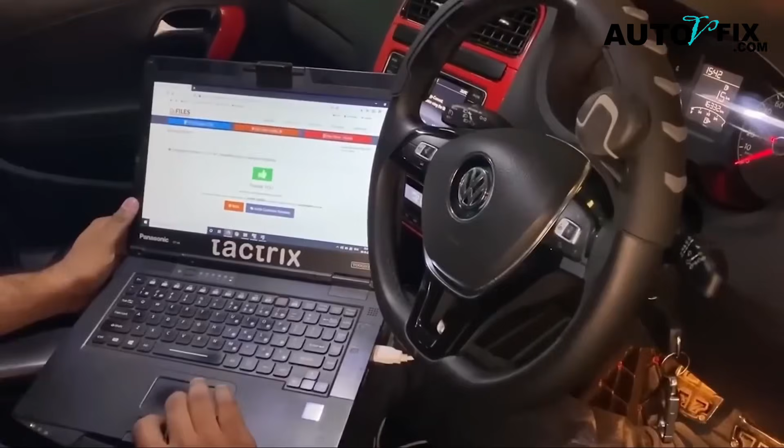If you reset your ECU at the wrong time, you can erase learned settings, hide the real problem for a short time, and still end up buying parts you never needed. And if you think ECU Reset, ECU Relearn, and ECU Reprogramming all mean the same thing, think again, because that confusion alone can cost you huge money.

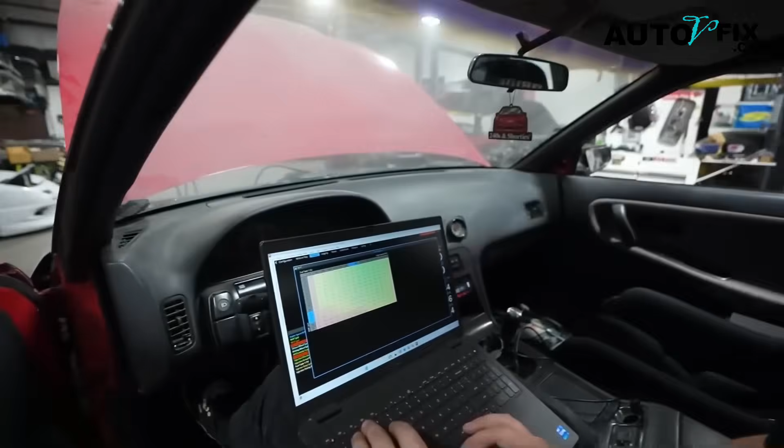So before you buy parts you don't need, let me show you what an ECU reset actually does, what ECU reprogramming really means, and how to reset the system correctly with or without a scanner. Because this is one of those areas where people make mistakes, clearing something they do not understand, and then end up making the car run worse instead of better, which is why this video is one of the most important videos you will have to watch on this topic.

If you are one of those drivers who hear the words ECU Reset, ECU Relearn, ECU Reprogramming, ECU Flashing, and ECU Reset after battery disconnect, and you assume all of those things mean the same thing, well, they do not. And if you mix them up, you can end up expecting a reset to fix a mechanical problem, or thinking a software reflash is the same thing as clearing adaptive memory.

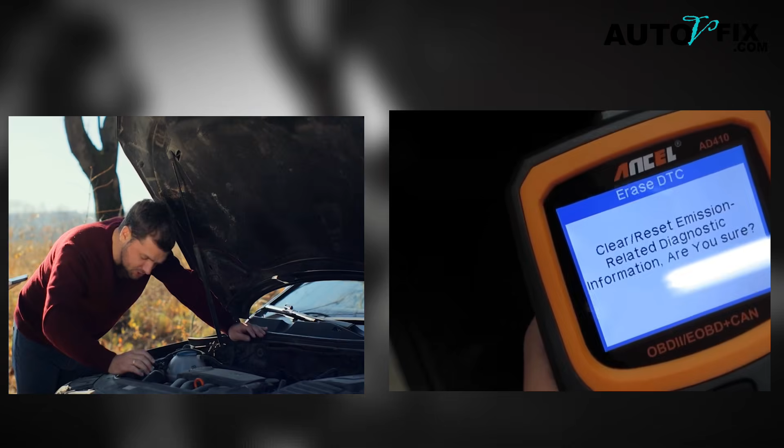It is not. So in this video, I am going to break this down as much as I can to show you what the ECU actually does, when resetting the ECU can help, when it will not help at all, the difference between ECU Reset and ECU Reprogramming, and how to reset it properly with a scanner and without a scanner. With that said, let's now start with the foundation.

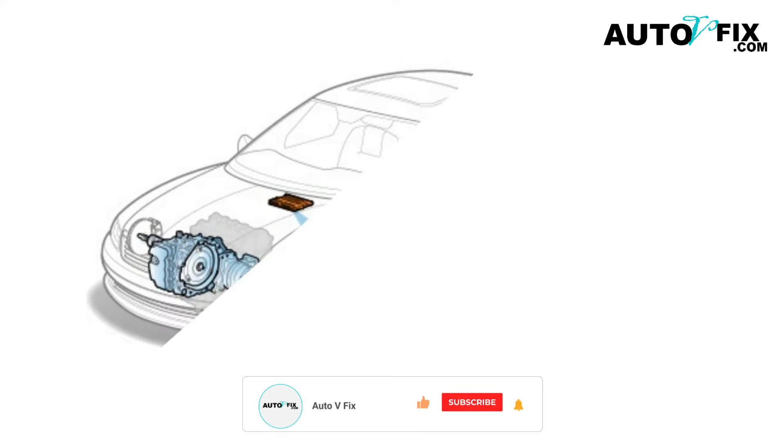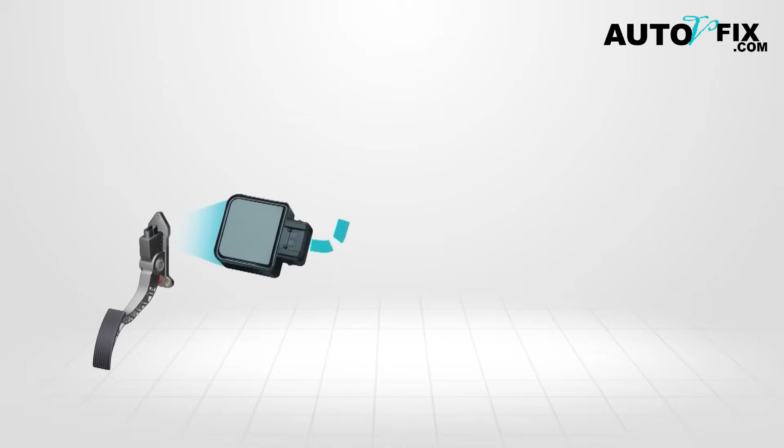What is an ECU? The ECU, or Engine Control Unit, is the computer that manages many of the engine's operating decisions. It uses input from sensors around the car and then adjusts things like fuel delivery, ignition timing, idle behavior, throttle response, emissions-related operation, and, in many vehicles, part of the communication that affects transmission behavior as well.

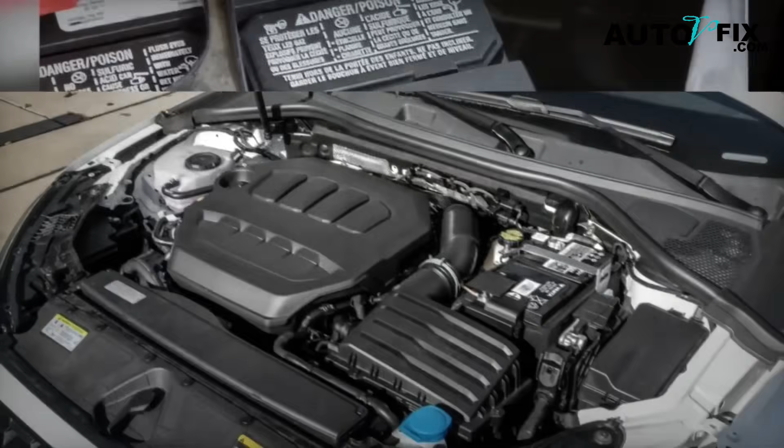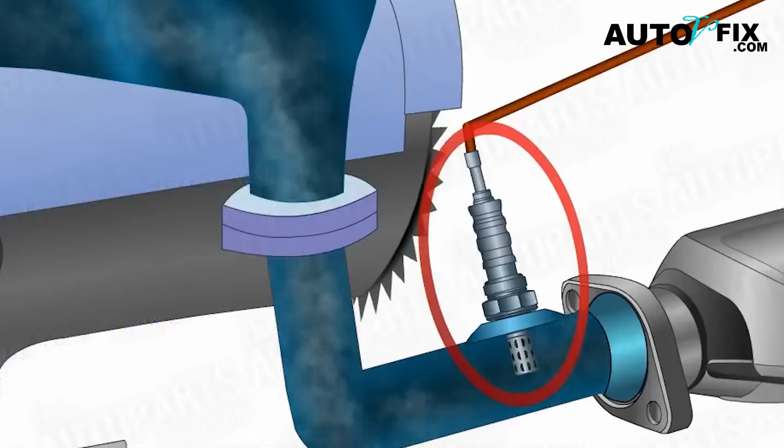So when you press the accelerator, you are not directly commanding the engine the way many people imagine. In a modern vehicle, you are sending a request. The ECU reads that request, checks sensor data, compares it to its programming, and then tells the engine how to respond. It looks at things like throttle position, oxygen sensor feedback, air intake data, engine coolant temperature, and more. Then it makes decisions in real time.

That is why the ECU matters so much. It is not just a box sitting there. It is constantly learning, adjusting, and correcting. And this leads directly to the reason people talk about resetting it in the first place. Why does resetting the ECU sometimes help?

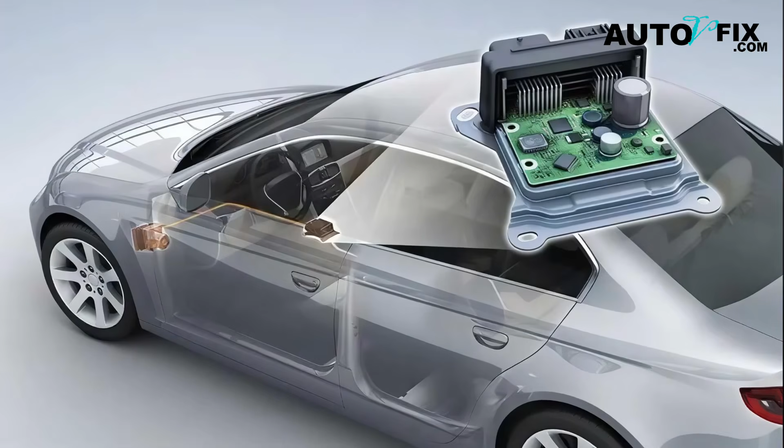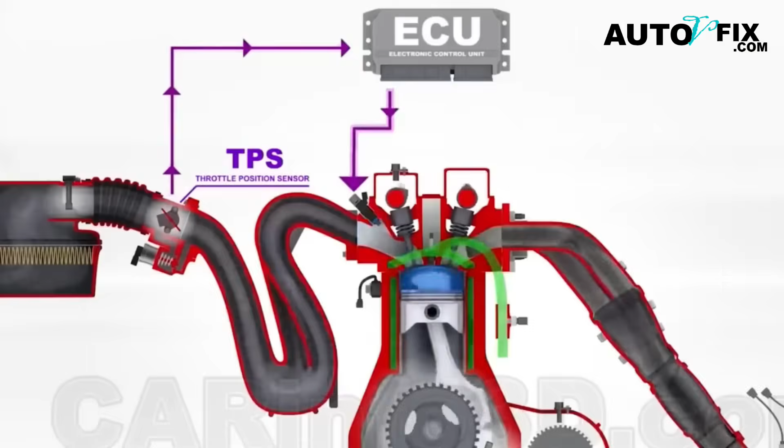Over time, the ECU stores what are called adaptive values, or learned memory. These are adjustments the computer makes based on sensor feedback, engine wear, carbon buildup, driving style, and conditions over time. In many cases, that helps the vehicle run better because the ECU is not relying only on fixed factory values. It is adapting. But sometimes those learned corrections are based on a problem.

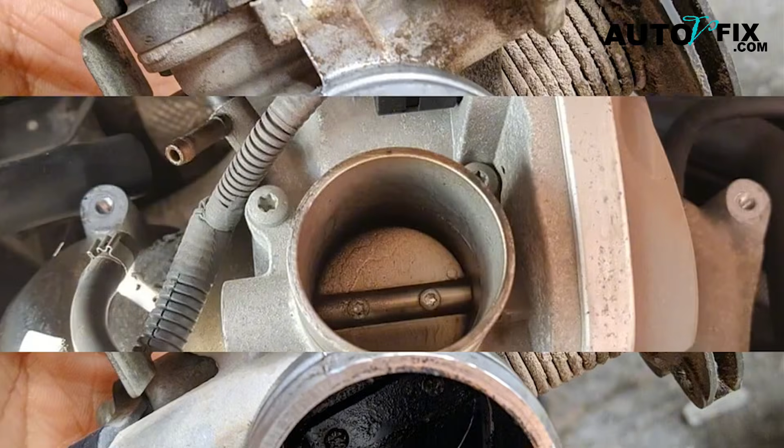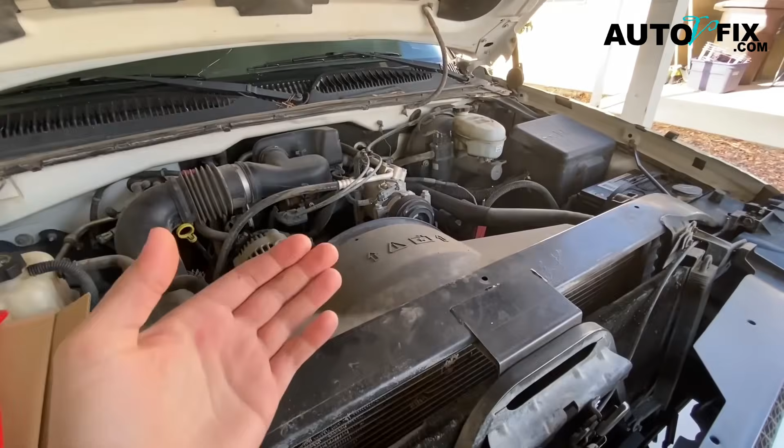Maybe the throttle body was dirty. Maybe a mass airflow sensor was weak. Maybe an oxygen sensor was reading badly. Maybe the battery was low. Or maybe the engine had been compensating for a vacuum leak or poor idle condition. Then you fix that problem, replace the bad part, or clean the component, but the ECU may still be carrying old learned behavior based on the faulty condition.

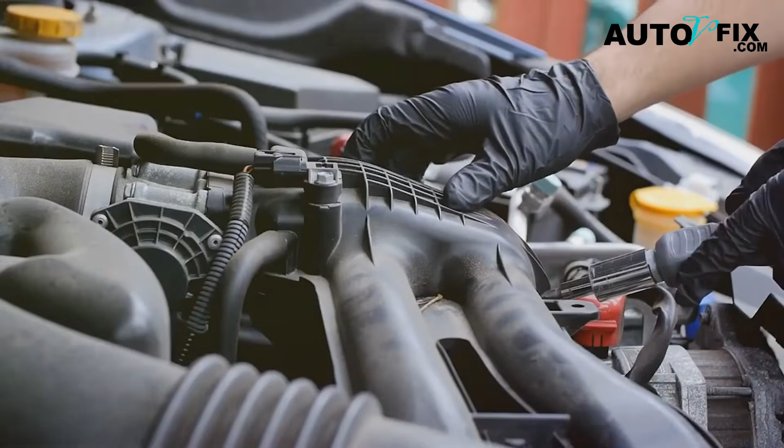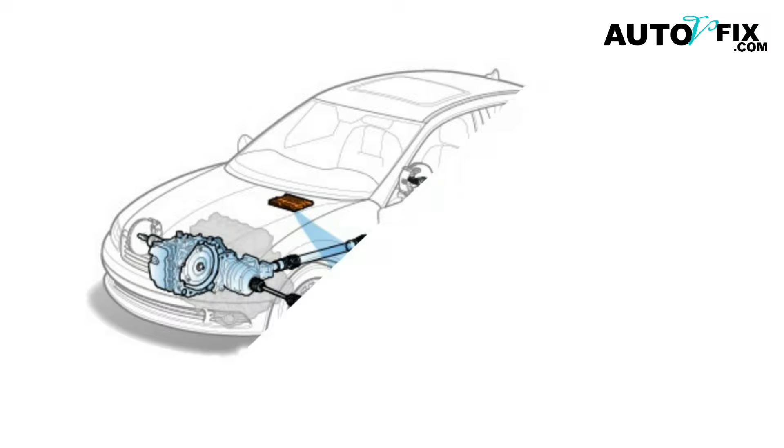That is where a reset can help. Resetting the ECU can clear learned adaptive memory and give the system a chance to start fresh. It forces the vehicle into a relearn process where it builds new values based on current sensor data instead of old corrections. And yes, sometimes that really does make a noticeable difference.

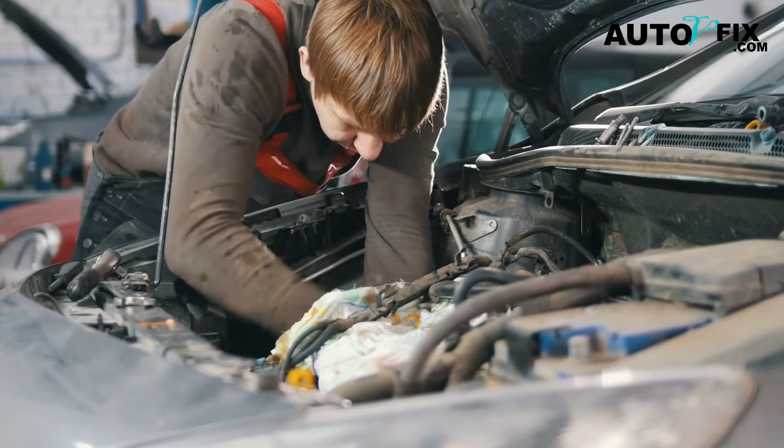For example, if a car had poor idle behavior because it had adapted around a dirty throttle body or a weak sensor, then the bad part gets replaced. A reset may help the ECU stop relying on those old learned adjustments. After a proper relearn drive, the engine may idle smoother, respond better, and behave more normally.

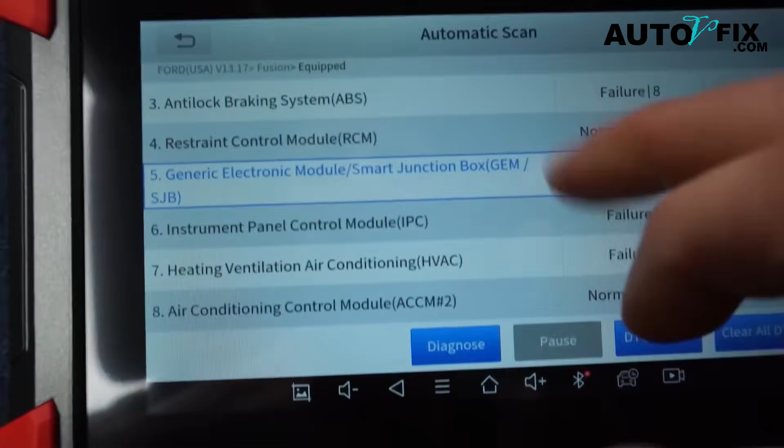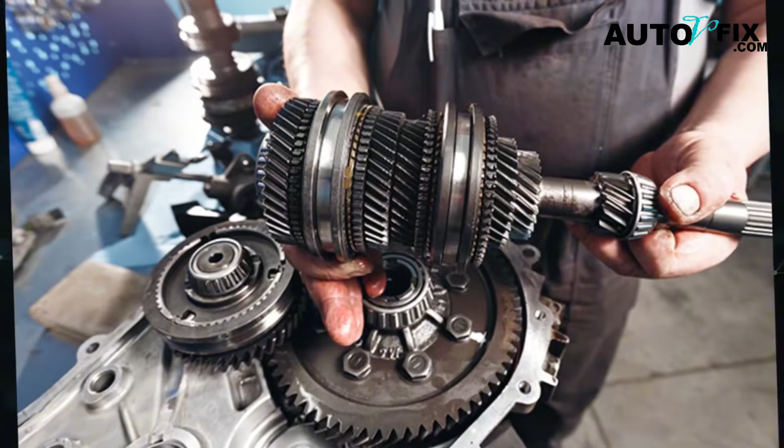But this is where people go wrong. Resetting the ECU is not a repair by itself. It does not fix a vacuum leak. It does not repair a bad ignition coil. It does not heal a slipping transmission. And it does not permanently solve a check engine light if the actual problem is still there.

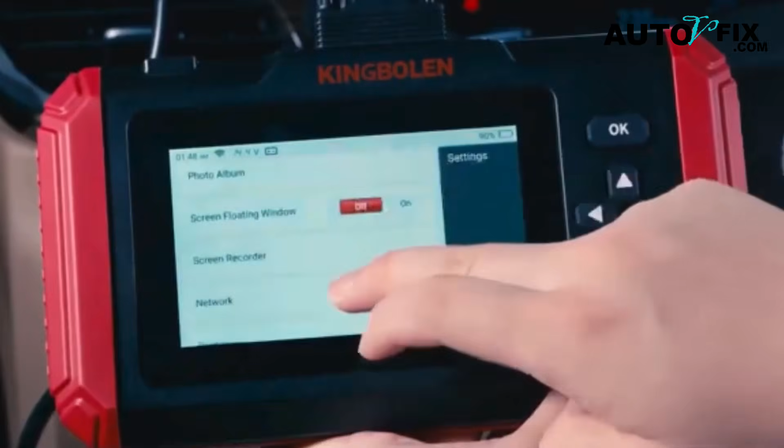A reset only clears learned memory and, depending on the method and vehicle, may also clear stored trouble codes. If the fault still exists, the problem usually comes right back. So before we go any further, just remember this. A reset can only help your computer to relearn new data, but it cannot fix broken parts.

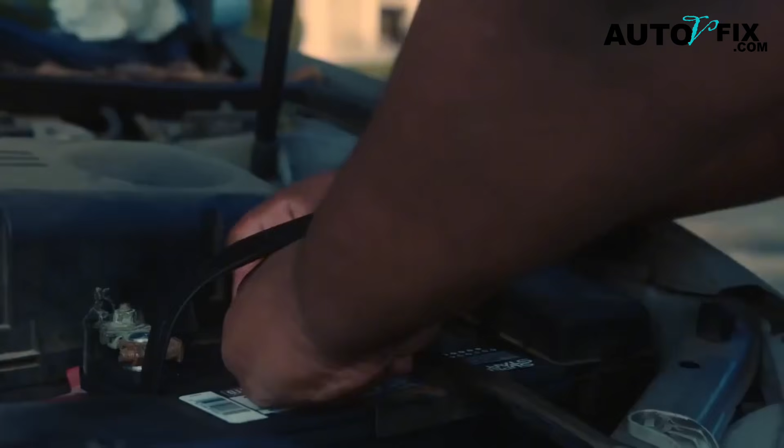Now, let's clear up one of the biggest sources of confusion: ECU reset versus ECU reprogramming. These are not the same thing. An ECU reset usually means clearing learned values, adaptive memory, and in some cases, stored codes, depending on the method used and the vehicle design. It is basically the system starting over from baseline learned behavior. It is not new software. It is the same software starting with less memory of past driving conditions.

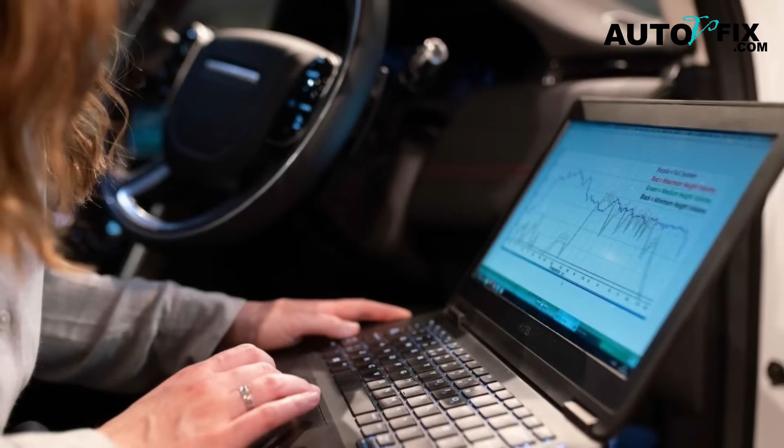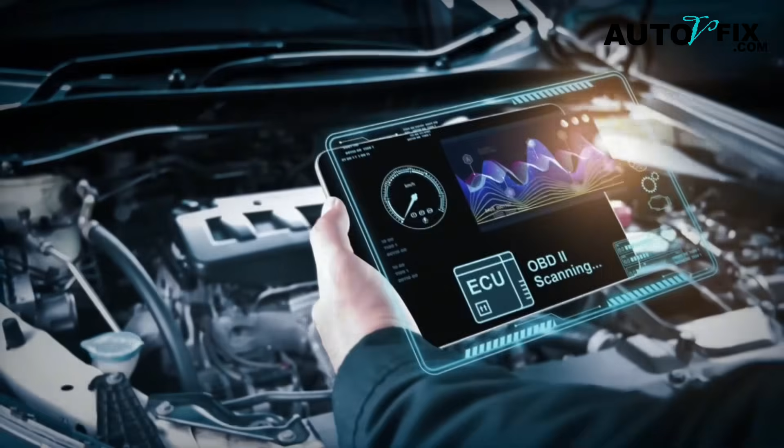ECU reprogramming, on the other hand, means changing or updating the software in the module itself. That can be a factory update from the manufacturer to fix a drivability issue, emissions issue, cold start issue, transmission behavior issue, or some other known calibration problem. It can also refer to aftermarket tuning or remapping, where performance-related settings are altered. That distinction matters. Reset means clear memory.

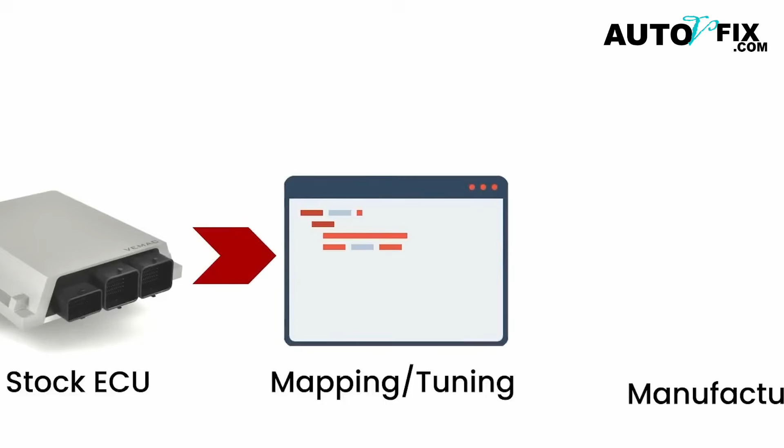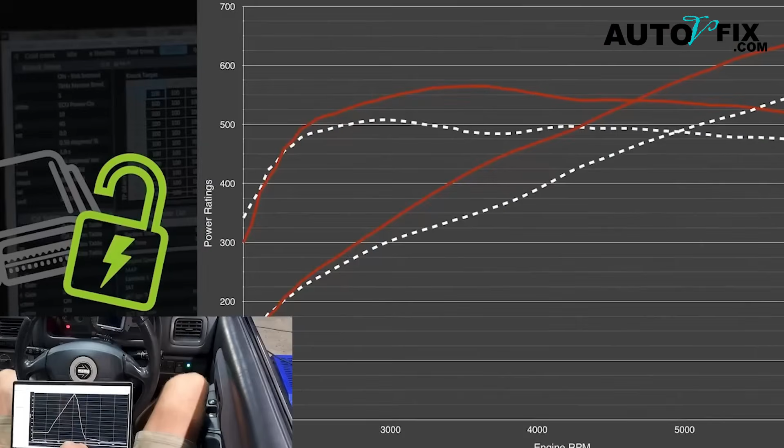Reprogramming means changed software. And this is why you should be careful with broad claims online. Not every ECU reprogramming job is a performance upgrade. Sometimes it is just a manufacturer software update. And not every reset gives more power or better fuel economy. Sometimes it just removes the old adaptations so the car can relearn properly.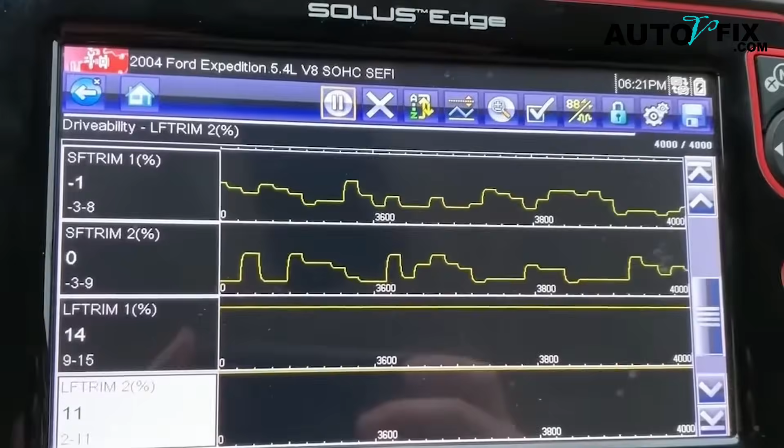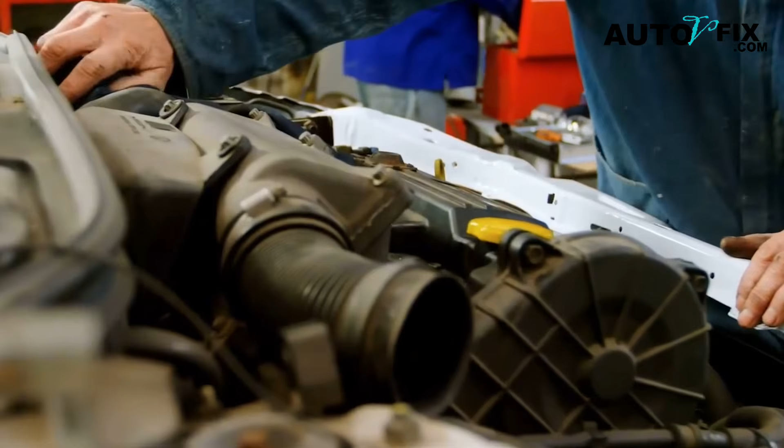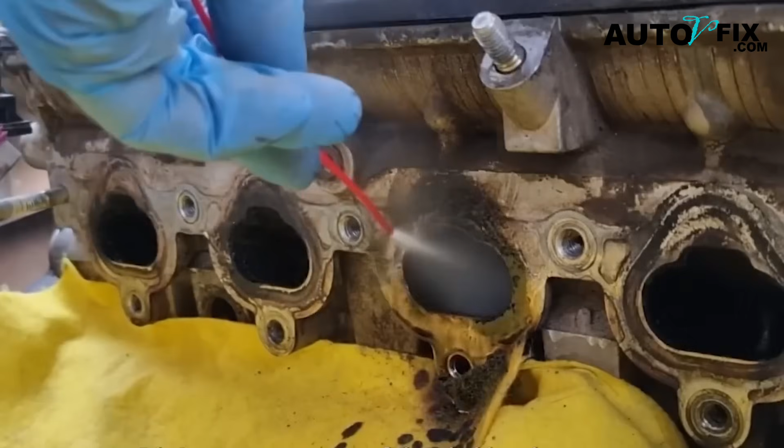Now let's talk about the actual benefits of an ECU reset, because there are real situations where it can make sense. One of the best times to reset the ECU is after replacing certain major engine-related parts, especially ones the computer relies on heavily for correction data. That can include a throttle body, mass airflow sensor, oxygen sensor, battery, or in some cases, after cleaning heavy carbon buildup that affected airflow or idle. If the ECU had adapted around the old condition, resetting it can help it stop using outdated correction patterns.

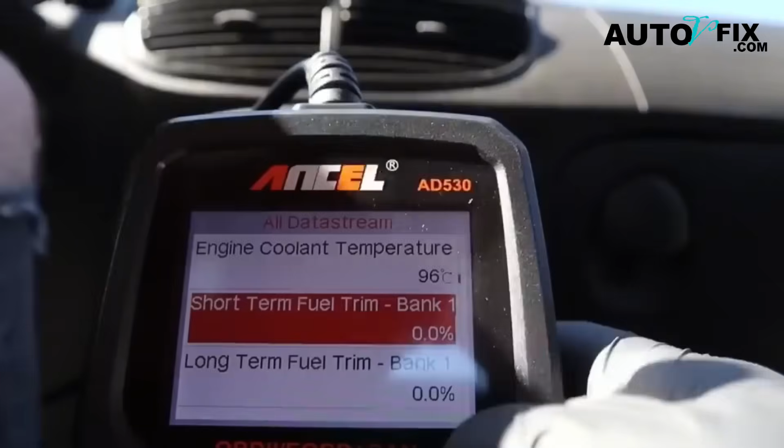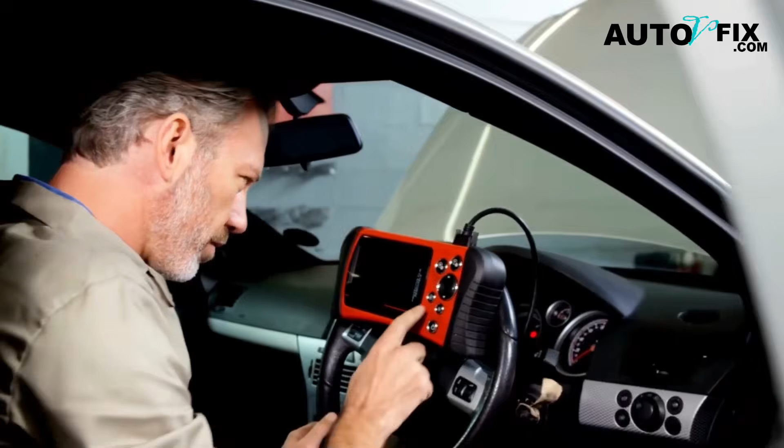Another situation is after drivability issues related to idle or throttle behavior have been corrected. If the idle had become unstable because of learned compensation and the root issue has already been fixed, resetting the learned values may help the system settle faster during the relearn process. It can also be useful after clearing up a fuel trim problem caused by a bad sensor. If the engine had been running rich or lean because of bad sensor input and you already replaced that sensor, the ECU may still hold trim corrections based on the old problem. Resetting may help the computer rebuild cleaner fuel trim values from the repaired condition.

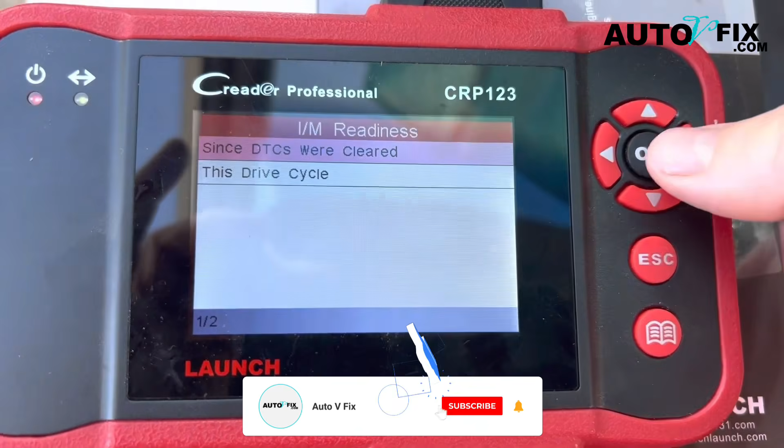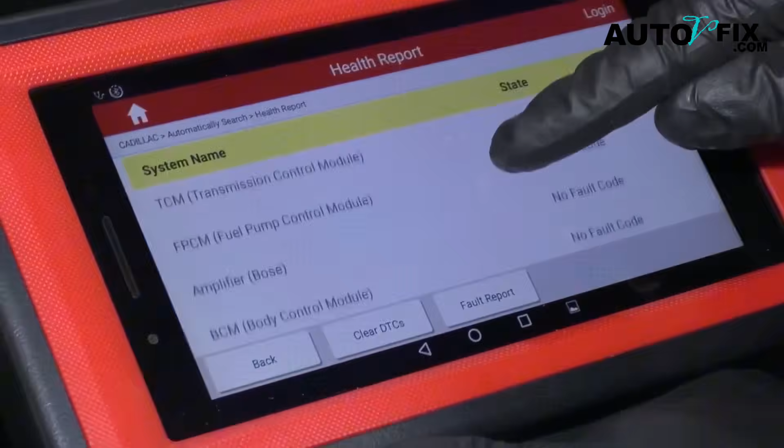And yes, sometimes people reset the ECU after a check engine light issue has been repaired and they want to clear codes and allow the monitors to begin again. That can be part of the process. But remember, clearing the light is not the same as solving the problem. That is why so many people say, "I cleared the code, but it came back." Of course it came back. You erased the message. You did not necessarily remove the cause.

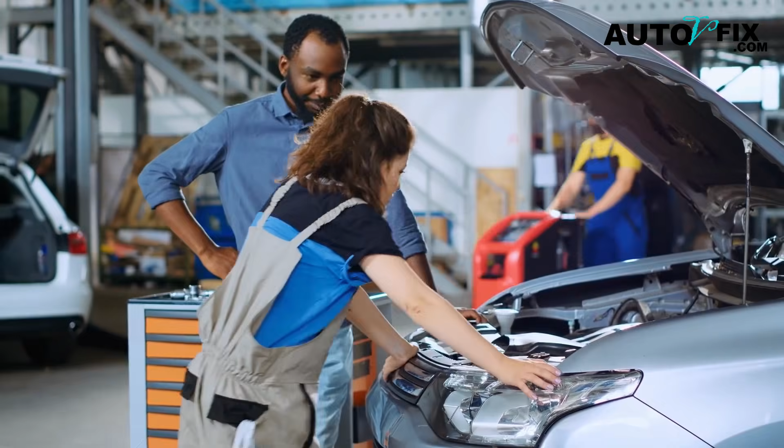Now, let's talk about ECU reprogramming benefits, because this is where people often hear exaggerated claims. A proper factory reprogramming update can improve drivability if the manufacturer released new calibration for a known issue. It can help with things like idle behavior, shift strategy on some platforms, sensor sensitivity, hesitation, cold start performance, and in some cases, emissions-related logic. That is real and valid.

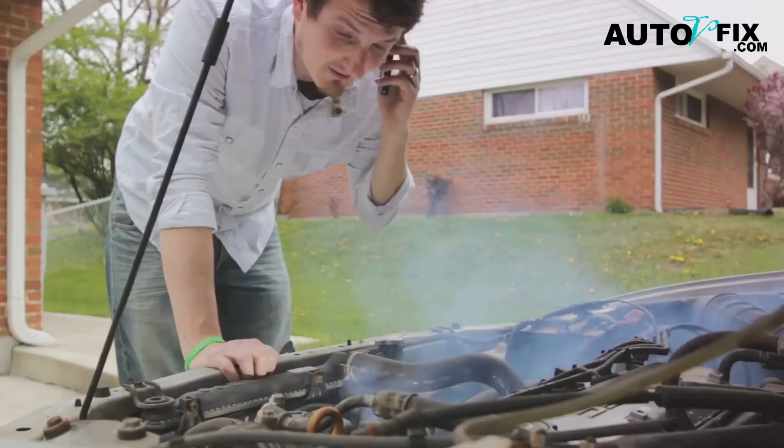Aftermarket reprogramming or tuning is a different world. That can increase power, change throttle response, alter boost targets on turbo vehicles, and change fuel and timing strategy. But that is not a free lunch. When tuning is done aggressively or poorly, it can increase stress, create drivability issues, increase heat, and in some cases, contribute to engine damage. So I would not present reprogramming as automatically better. It depends on why it is being done, how it is being done, and whether the vehicle is in good condition to begin with.

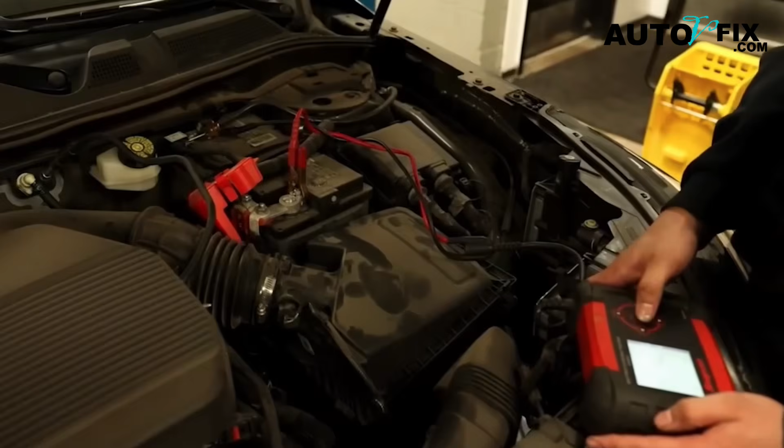When should you never reset the ECU? Do not use a reset as a shortcut when the engine is actively warning you that something serious is wrong. If the check engine light is flashing, that often points to an active misfire severe enough to risk catalytic converter damage. If the engine is knocking, overheating, or the transmission is slipping badly, a reset is not your first move. In those situations, resetting can distract you from the real problem and delay proper diagnosis. So if the car is showing major warning symptoms, diagnose first. Do not reset first and hope.

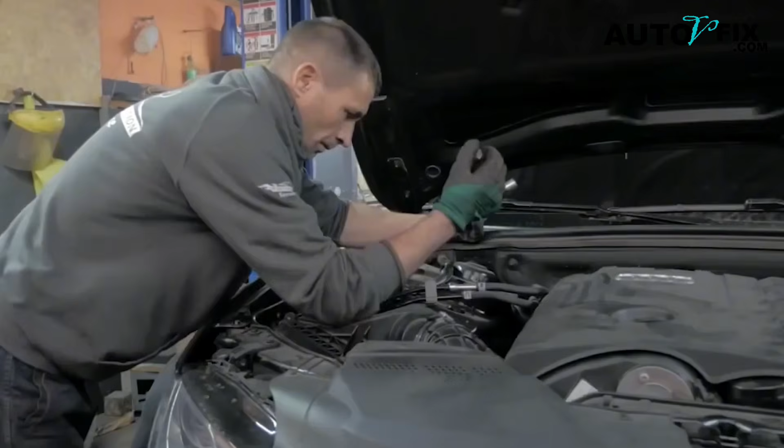Now let's get practical. How do you reset the ECU with a scanner? This is usually the best and cleanest method because it gives you more control and lets you see what is going on before you erase anything.

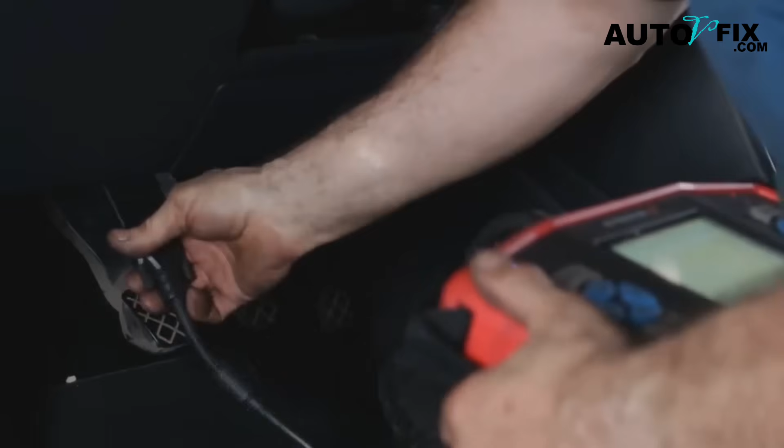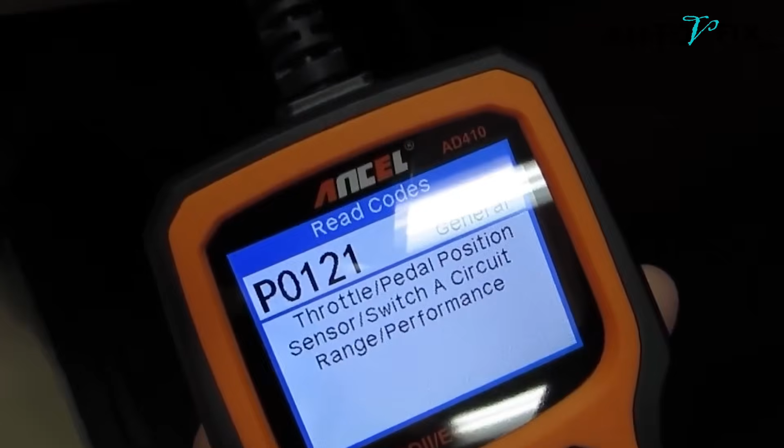Start by plugging the scanner into the OBD2 port. Turn the ignition to the on position without starting the engine if your vehicle requires that for scan communication. Then read the trouble codes first. Always read and record the codes before clearing anything. That part matters because once you erase them, you also erase valuable diagnostic information.

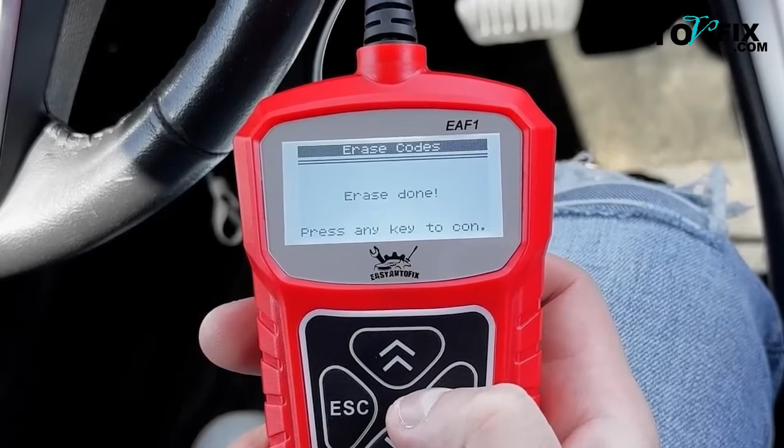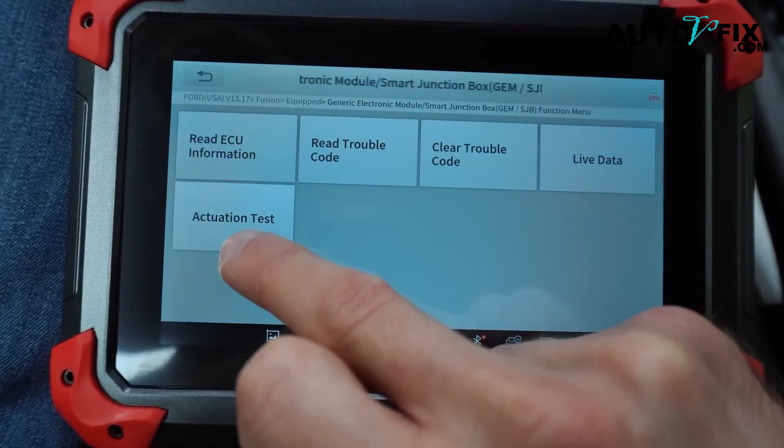After recording the codes, use the scanner to clear trouble codes or perform the reset function if your scan tool has one. Some higher-end scanners may also have specific relearn or adaptation reset functions for certain systems. After that, start the engine and let it idle for several minutes without pressing the accelerator aggressively. Then drive the car normally so the relearn process can begin.

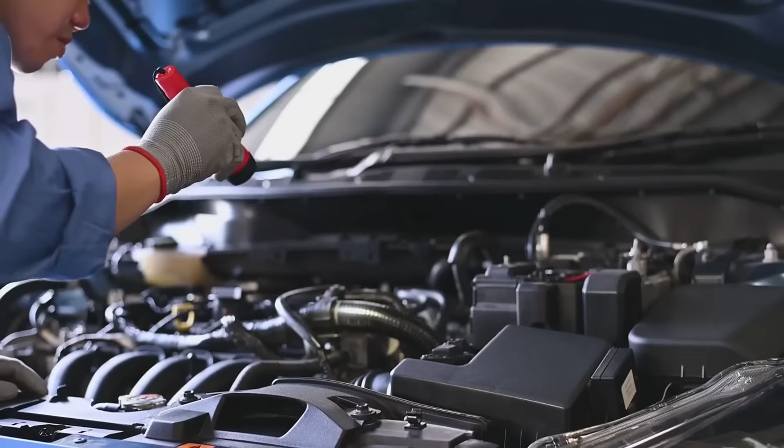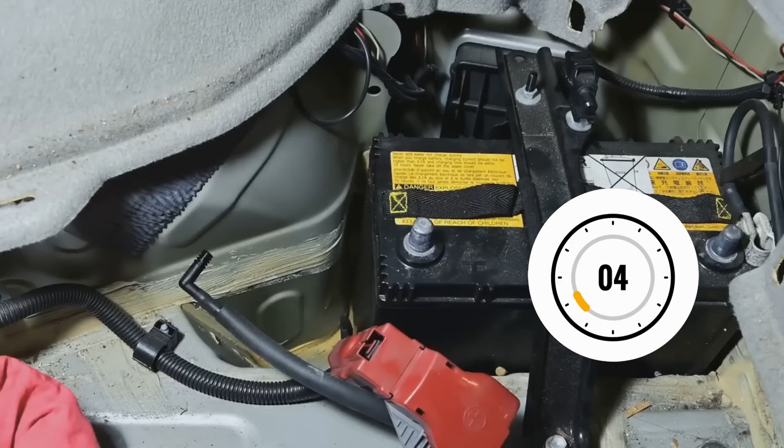And that brings us to resetting without a scanner. The most common old-school method is disconnecting the battery. Turn the vehicle off completely, remove the key, and disconnect the negative battery terminal. On many vehicles, leaving it disconnected for around 15 to 30 minutes may clear some adaptive memory. After reconnecting, the ECU may begin relearning from a more basic starting point.

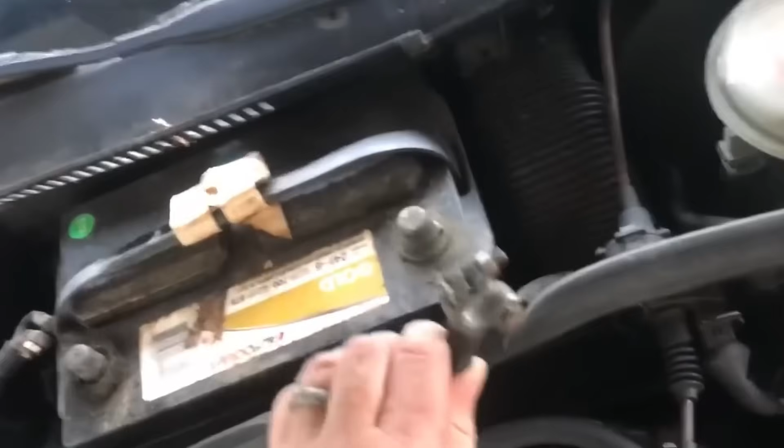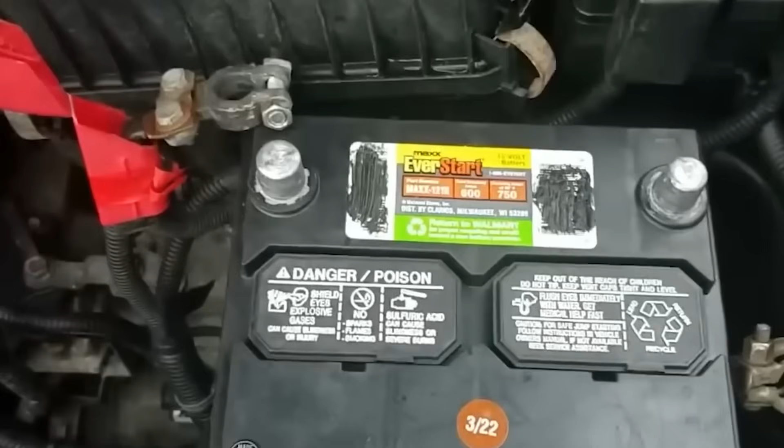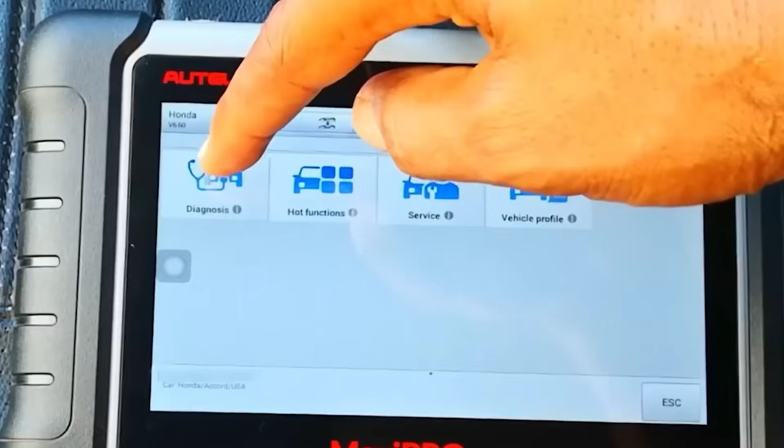Now, I want to be careful here. Battery disconnect is not a universal magic reset for every vehicle. On some modern cars, certain memory is retained, and some codes or module behavior may not clear the way people expect. Also, disconnecting the battery can erase radio presets, clock settings, window memory, seat memory, and other learned settings depending on the vehicle. So this method can work in some cases, but it is not the same as a full software reprogramming, and it is not always the best method.

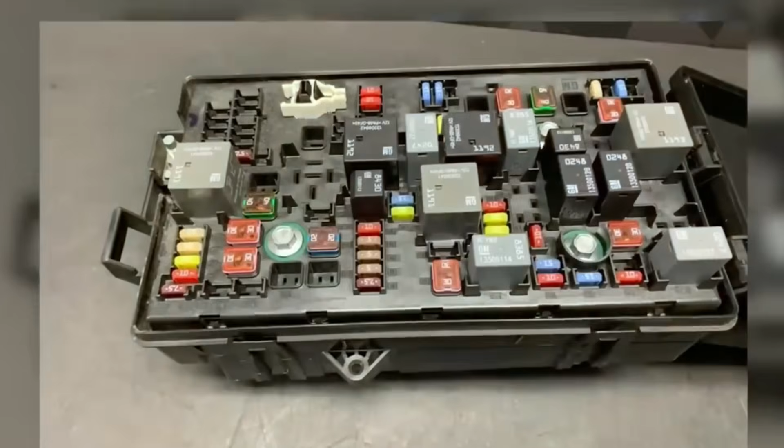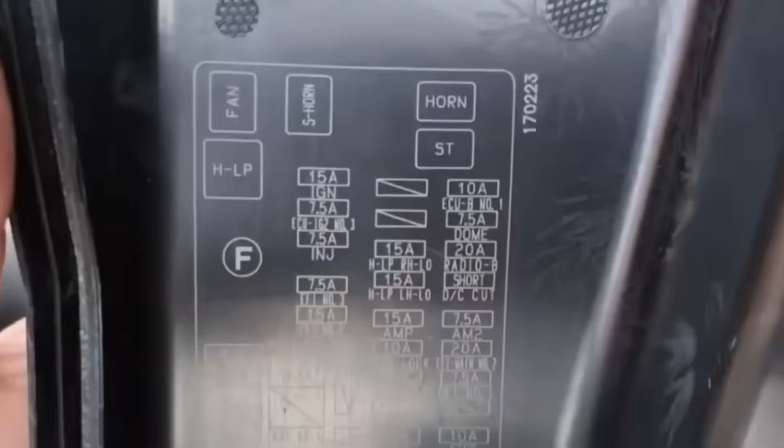Another method some people use is removing the ECU or ECM fuse briefly, but I would present that with caution. Fuse layouts vary, labeling varies, and pulling the wrong fuse can create confusion or unintended problems. So unless the user is looking at a reliable fuse diagram for that exact vehicle, I would not present fuse pulling as the first recommendation over using a scanner or battery disconnect.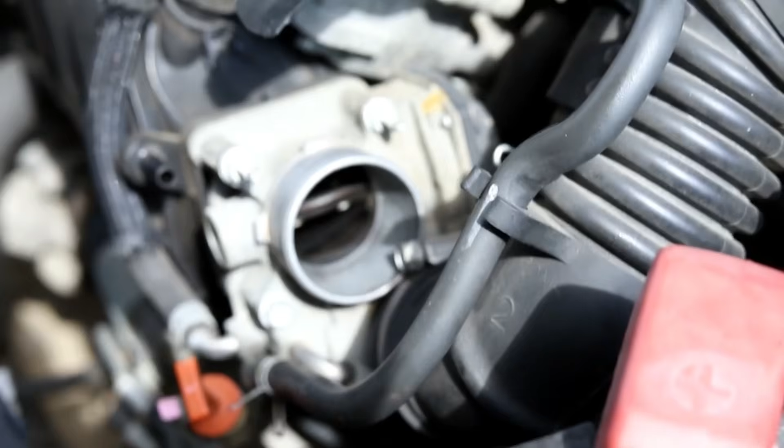Now let's talk about what happens after a reset, because this is where many viewers panic and think they made things worse. After an ECU reset, the car may not feel perfect right away. Idle may be higher than normal or fluctuate for a short time, because the ECU is relearning idle control and throttle behavior. Throttle response may feel different because the computer is not yet working from the same adaptive patterns it had built over time. Fuel trims need time to rebuild. In some vehicles, transmission shift feel may also change temporarily while related systems adapt again.

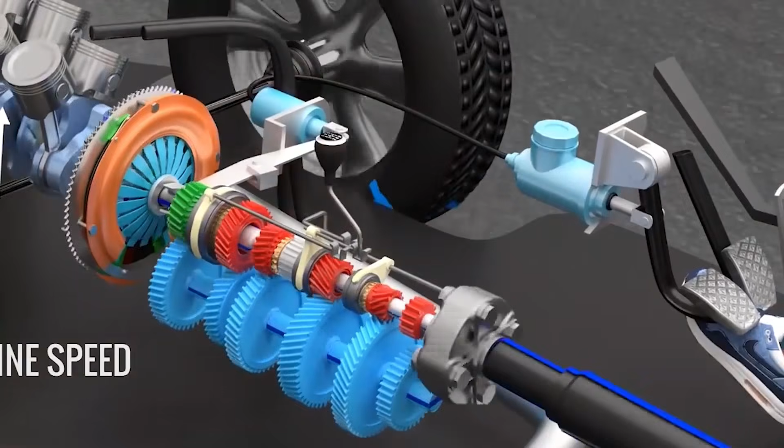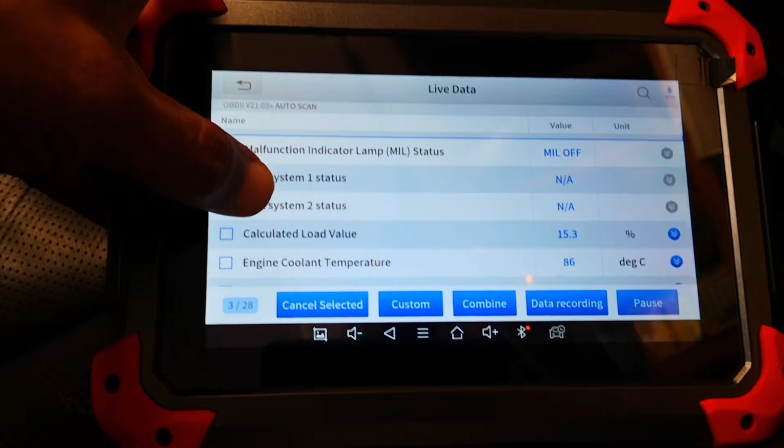That is why the relearn phase matters. After a reset, let the engine idle for a few minutes, then drive the car gently under mixed conditions so the ECU can relearn airflow, throttle behavior, fuel trim behavior, and other normal operating patterns. It may take some driving time before the vehicle feels fully settled again. That does not necessarily mean something is wrong. It often means the relearn process is still happening. But again, if the vehicle has a real unresolved fault, no amount of relearn will hide it forever.

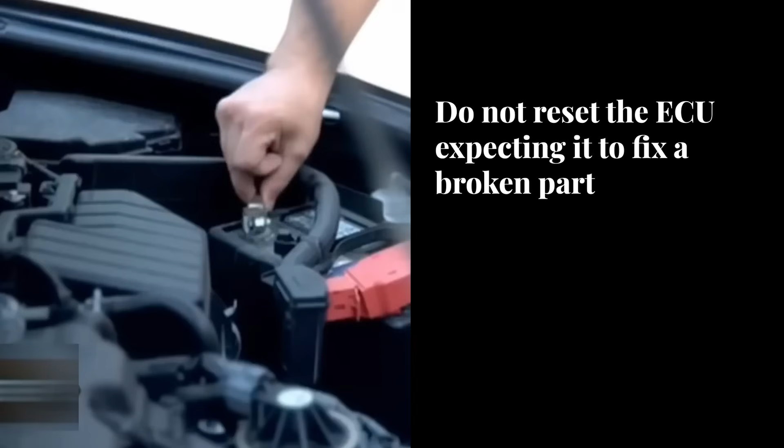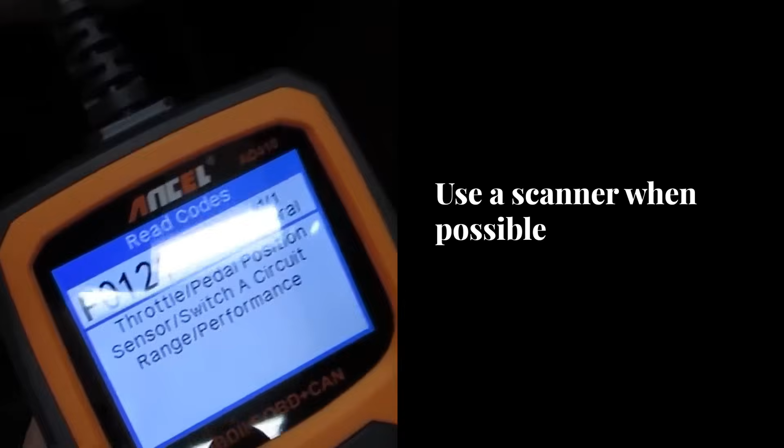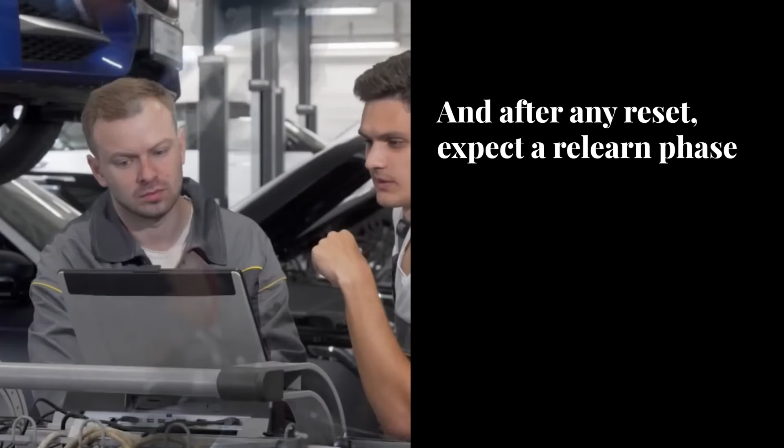Now let's simplify this into one honest decision framework. Reset the ECU if you have already corrected the underlying problem and want the system to stop relying on old learned behavior. Do not reset the ECU expecting it to fix a broken part. Use a scanner when possible because it is cleaner, more controlled, and lets you record codes first. Treat battery disconnect as a basic reset method, not a cure-all. Understand that reprogramming is different from resetting. And after any reset, expect a relearn phase.

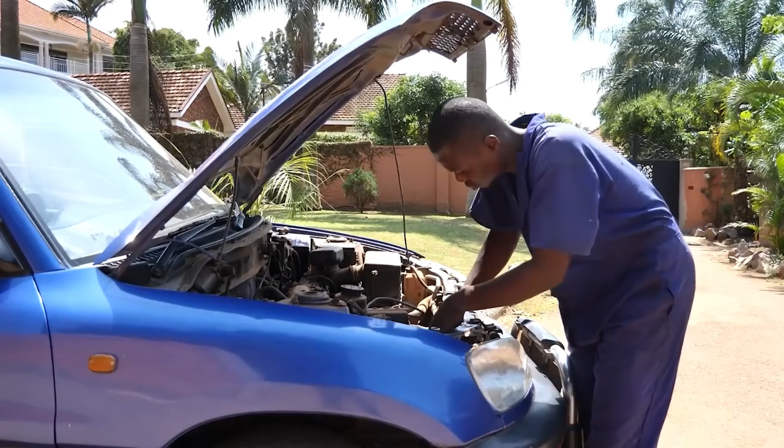So before you reset anything, ask yourself one question. Am I trying to fix a real fault, or am I just clearing data? Because that one question can save you from wasting time, replacing the wrong part, or convincing yourself the problem is solved when it is not. And that is really the biggest takeaway in this entire topic.

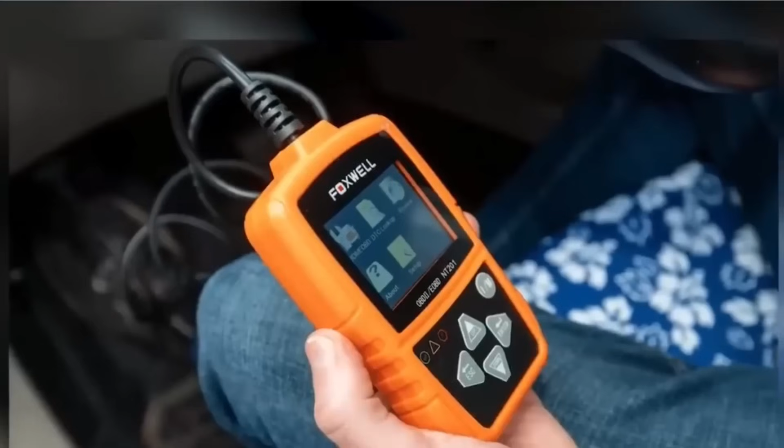Sometimes an ECU reset helps. Sometimes it helps a lot. But it helps because it clears bad learned behavior after the actual issue has been addressed. It does not replace diagnosis. It does not replace repair. And it does not change the fact that a mechanical or electrical problem still has to be fixed properly. If you understand that, you are already ahead of most people searching this topic online. So the next time someone tells you to just disconnect the battery and everything will be fine, you know better.

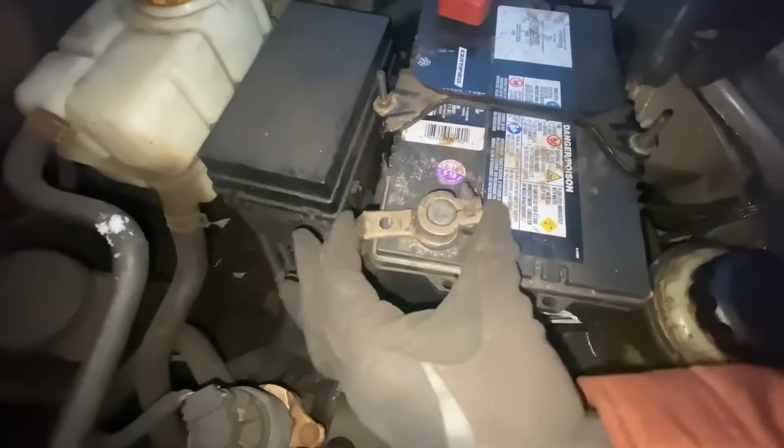And if you have ever reset your ECU before and the problem still came back, that usually means the reset was never the real fix.